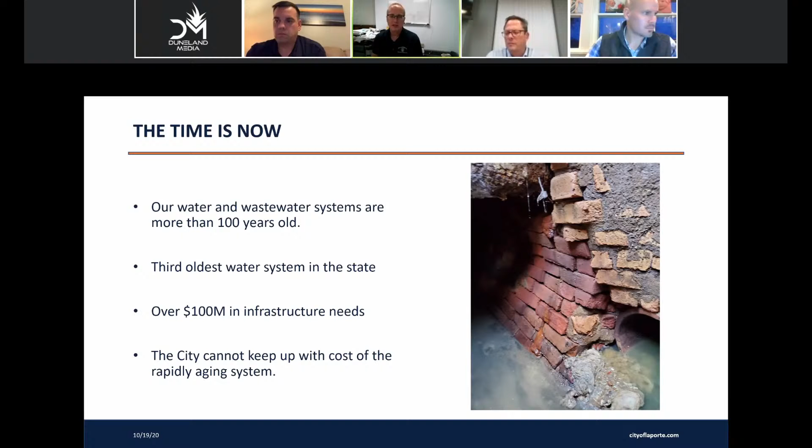We've replaced several runs of brick sewers over the years. There's a run on Indiana Avenue that we're going to replace with the reconstruction of Indiana Avenue in 2025. This piece we haven't got to yet. It's part of the infrastructure. You always hear about the failing infrastructure that we haven't spent the money and upgraded yet. This is an example here in LaPorte.

So we have issues both in our water system and our wastewater system. And as we talk about our wastewater system, stormwater system, approximately 75% of the city's sewer system is made of combined sewers, which means it carries both wastewater and stormwater in the same line. And Jerry, if I'm not mistaken, this is no longer even approved by the EPA to run systems in this way. Yeah, you cannot build combined sewers, and cities all across Indiana are working and spending a lot of money to eliminate combined sewers.

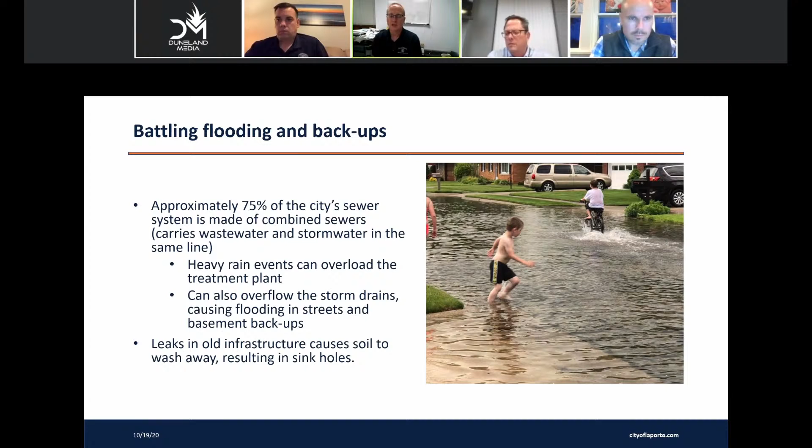When it rains, the wastewater treatment plant gets a tremendous volume of wastewater mixed with stormwater that it has to treat. At times that exceeds the capacity of the treatment plant, and you get an overflow. As you see in the picture, combined sewers are often undersized. Here, that couldn't handle the storm earlier in the year and flooded the intersection. And the kids really shouldn't be playing in this water.

The picture here, explain exactly. Again, this isn't a picture you pulled off the internet. These are service lines from LaPorte, Indiana. Yes, thank you. That's a 4-inch cast water main that was installed here in LaPorte in the early 1900s.

What you're seeing there is buildup of tuberculation and corrosion from the inside of the pipe. And what that does is that creates not only less capacity for the water to fill that pipe, but a lot of times that's where our dirty water comes from: when we have these high flow situations and the water is flowing through that pipe at a very high rate, it scours that off and suspends it in the water. And that's what residents are seeing when they see the brown, orangish water: iron buildup inside the pipe.

We have 22.9 miles of 4-inch main inside the city limits. And as well, the pump water, which we all take for granted right now, we have a header which leads into plant 2 that really is 10 to 20 years over its useful life. And if that goes out, which you've been told we're a ticking time bomb at any day, any point, we would lose 65% of water to residents across our community. Could you expand on that a little bit?

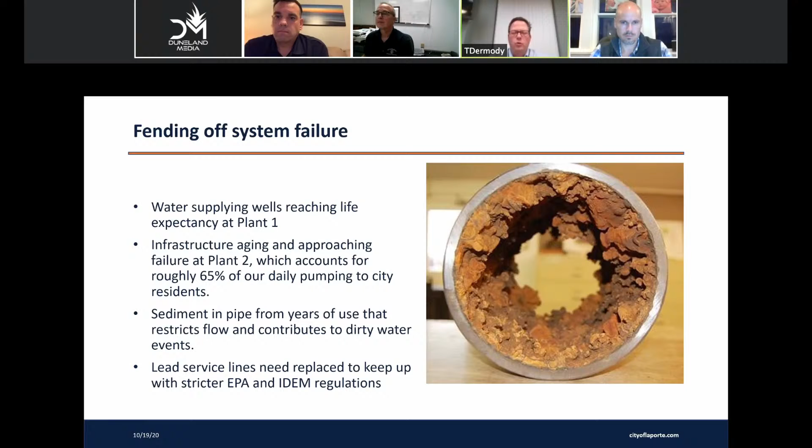Great. So we have sewer, wastewater issues. We have water issues that can't be delayed. So we're going to take action. Projects beginning in 2021. And this is what we're presenting to the City Council for their vote on Monday evening: to approve infrastructure investment of $25 million in a bond. And some of the main projects that will happen across the city, besides those fixes and repairs within the plant, are sewer separation, the final phase of Monroe Manor.

Jerry, Jackson, I think we've received many calls, especially you, on when Monroe Manor will be repaired. We did a little more than 40% of the work in 2015, rebuilding the sanitary sewers, installing storm sewers, replacing curb, gutter, sidewalk, and roads. And the rest of the subdivision, 60% of it, saw their neighbors all getting new infrastructure, and theirs is in really bad shape. So we've got a lot of pressure from that other 60%: hey, come finish the job. And it's time to finish the job.

That neighborhood was war era construction. The pipes are all full of roots because they used poor quality pipes, sometimes concrete, sometimes clay tile, whatever they had on hand. The roads go up and down as the curbs have sunk and there's puddles everywhere. It's in real need of work, and I'd very much like to finish it up.

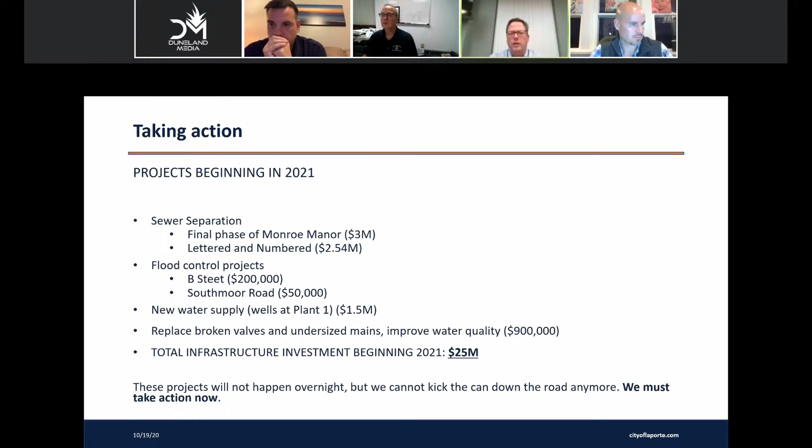So Eric Walsh, if I can put you a little bit on the spot here as we compare rates, and Eric Walsh from Baker Tilly has really been helpful in closing on the bonds. Do you want to talk a little bit about it from a cost perspective and so forth?

Sure. The structure of the $25 million of infrastructure that the mayor alluded to earlier is really a combination of two different bond issues. There's a water bond issue that will be supported wholly by the water rate adjustment that we're talking about tonight. And then there's also a sewer/stormwater bond issue. Sewer and stormwater, although they go for different uses and different purposes, are really part of the same utility, the sewage works. So there'll be a bond issue as well that'll be supported by sewer and stormwater fees. It'll go to repay that debt issue.

As the mayor has on the screen here, the subsequent rate adjustments needed to support that $25 million in infrastructure and the repayment of that debt over the next approximately 20 years are shown in the La Porte proposed 2021, 22, 23, and 24 on the screen. It will be a 4-phase rate adjustment that's being proposed for water and sewer. And then for non-residential stormwater customers, it would be a 2-phase rate increase. No increase to residential stormwater customers. Only non-residential will see the stormwater rate increase.

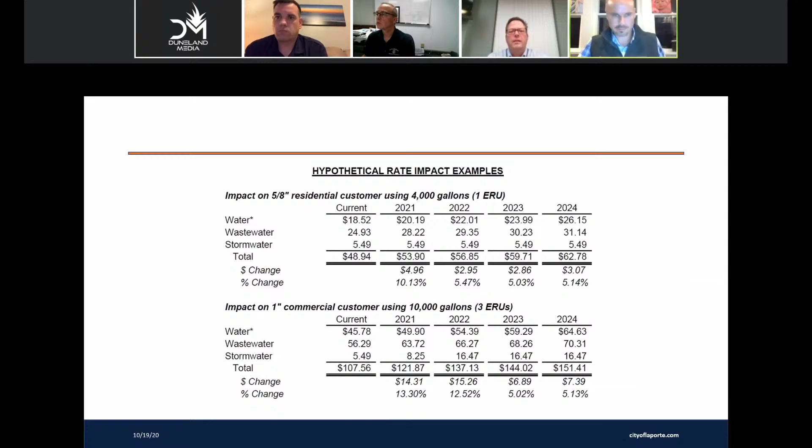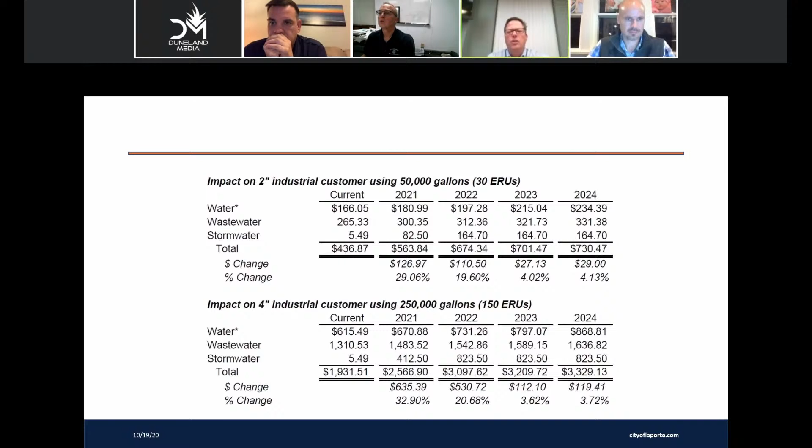Thank you. So how are we paying for it? What we're asking the council to approve is a rate that will keep us still well under the state average. And I'll go here. Basically what we're asking in year one, 2021, for an average resident user that's using 4,000 gallons a month, which is the state average, is a $4.96 increase a month, or 17 cents per day.

And the last thing that myself and the department heads want to do is come before the public and ask for an increase. But these dollars are not going into our pockets or into department pockets. They're going out to improve our infrastructure so that we don't wait until there's complete damage or infrastructure failure, and we're coming to you to say you can only use water for an hour a day, or we have a boil order before you can drink the water. The city has not been able to keep up to make these improvements, and the time is now.

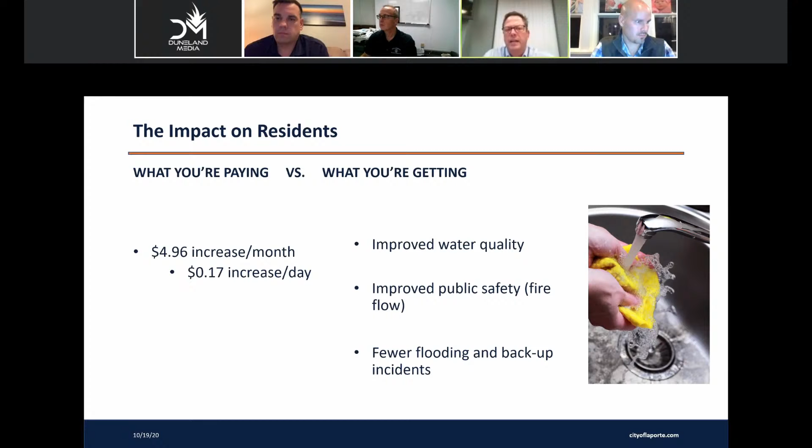So the council could say no and kick the can down the road a little bit further. But if that happens, water quality will continue to diminish. Dirty water events will occur more frequently. And again, you saw the sample which Superintendent Werner showed you with all of the sediment inside the piping. We will deal with boil orders, continued flooding and basement backups, which is one of the top phone calls that we receive from you as the residents. Potential fines from the EPA and IDEM. And Jerry, could you explain the EPA fines and how that happens?

Sure. There are a couple issues to talk about. When we have a sewer overflow, when the sewer can't hold all the stormwater and sewage and overflows either into the street or into yards or into a basement, that's something that I report to IDEM. When those sort of things happen with enough frequency, you attract the attention of IDEM and the EPA, and they come after you and force you to fix those problems instead of doing it on your schedule and in the way we would prefer to do it.

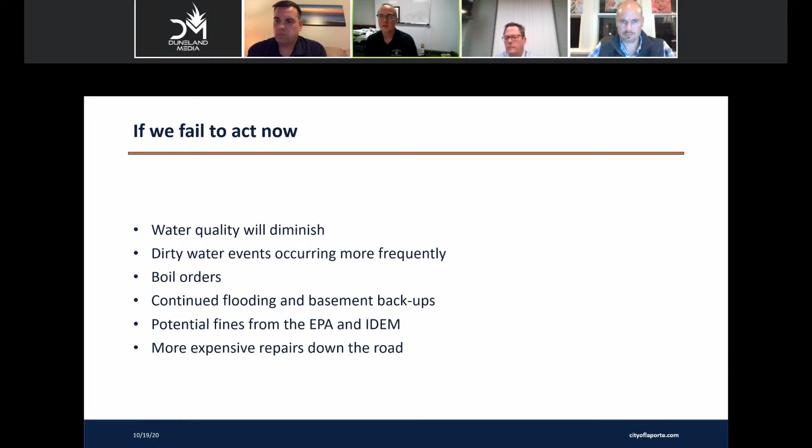The other issue is we have to remove phosphorus from our wastewater at the treatment plant. That's a requirement to stop the algae blooms downstream and in the Gulf of Mexico, the dead zone. So if we don't do that, we'll be violating our discharge permit. And again, we could get fined by IDEM and EPA, and then they would make us do the project on their schedule and on our dime. So these projects are designed to avoid that sort of attention, and the city saves money when we avoid that sort of attention.

So with that, we'll take questions on Facebook. Anything that you have, we want to make sure your voice is heard, but we're asking for your support. We're asking the residents of this community to say, hey, over the next 4 years, we want this infrastructure repaired, improved on, and get us moving forward to be the community that we need to be. And again, I can't speak to why these haven't been done in the past. The city has not had the funds. They can't keep up. And with the leadership of our superintendents here, we believe it's time, and we can't wait till something drastic happens.

Again, as Tim Werner has said, we're a ticking time bomb. So if you have questions... In fact, Drew Mullen just stated, I'll gladly pay more. We really need to build more dense housing within the city to increase the tax revenue. This is just one of many examples of why we can't afford a low density dispersed city.

And again, I don't think there's anybody arguing about the housing. We fully appreciate Drew standing up and saying that. And again, that's why many of the local media have said LaPorte is a place that is having a housing boom right now. And we're going to continue that and make sure that there are places to live within the city limits.